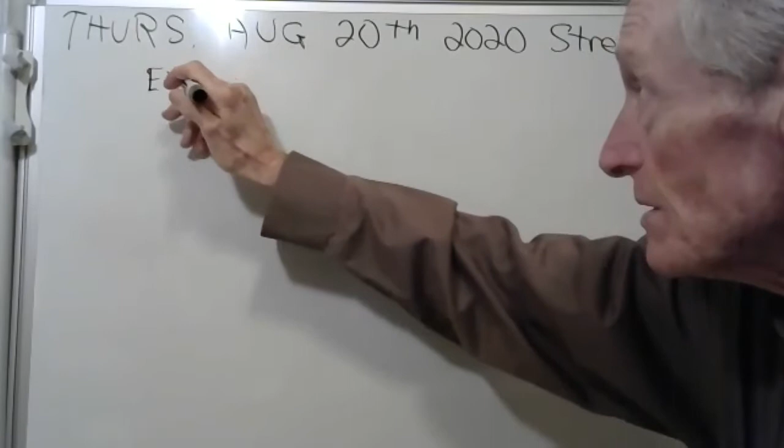Okay, well, we're going to get started. Let me make a note to my IT person. All right. We are in Strength of Materials. I'm going to look at my syllabus, or my schedule, and see what we're supposed to do today. This says stress and internal loads. Okay. Well, you can't do internal loads unless you have the external loads. So there's external loads, and there's internal loads. In order to find the internal loads, you first have to find the external loads, and then you can get the internal loads.

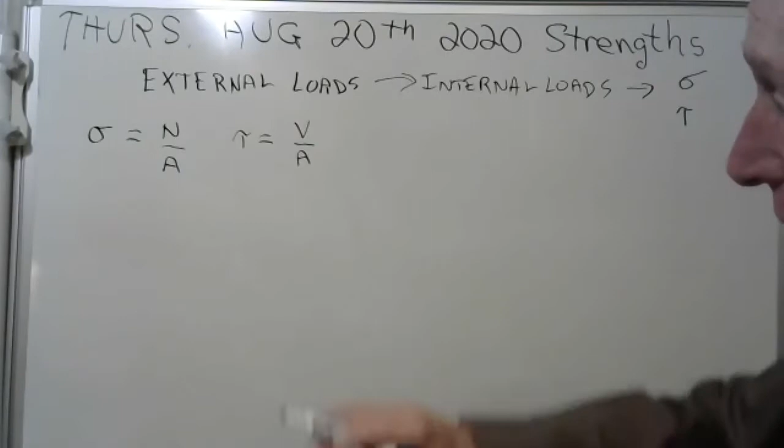And once you get the internal loads, you can get the stresses, because there's two kinds, as I was telling you last time. This is normal stress and that's shear stress. They come from the internal loads. There's an equation for normal stress that goes like this. You see that N right there? That's an internal normal force. And shear stress goes like this. You're dividing by the area. You see that V right there? That's the internal shear force. To find the stresses, which are all important, you've got to get the internal loads.

Now let me show you the difference between forces and stresses here. Let me see who I've got right now. We got a good crowd here. We've got Nicholas, Ashley, Ben, Brendan, Brian, Mohammed, Julian, Darren, and Chase. We got a great group here.

Okay, well, let me demonstrate. The most important concept in this class is stress, and it comes in different types. This here is called normal stress.

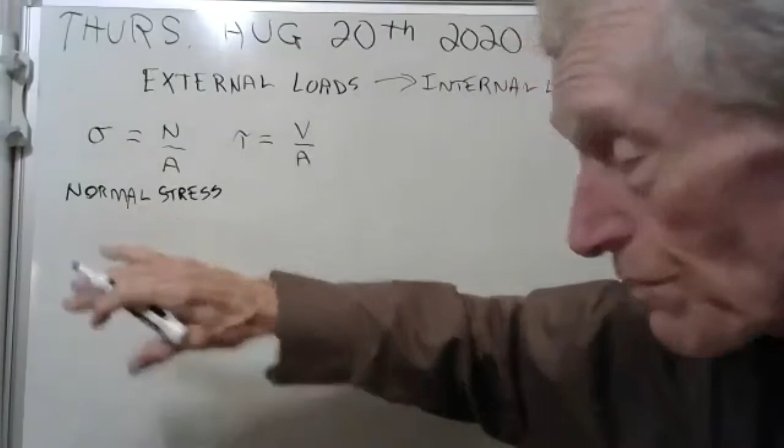The word normal refers to being perpendicular to a surface. And then this is shear stress. Shear stress is not perpendicular to a surface, it's parallel to a surface. Normal is perpendicular, shear is parallel. Here's your symbols. That's a little secret symbol for perpendicular, and there's the little secret symbol for parallel. Any questions so far?

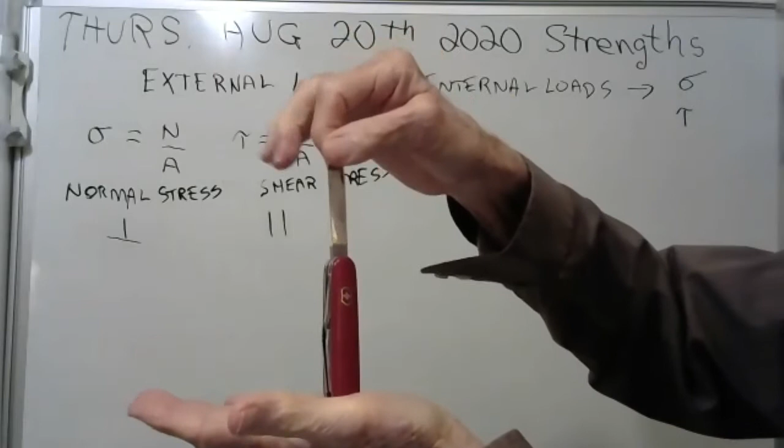Okay, well, let's do some problems and try to show you that. I was going to show you though about why stress is so important. I've got my Swiss Army knife here. I'm sure you guys have all seen a Swiss Army knife. Now, if I take this Swiss Army knife and I just hold it on my hand like that, that doesn't hurt the palm of my hand at all. Of course, if I let go, it'll fall. I have to kind of hang on to it there. But it's not hurting my hand or my finger.

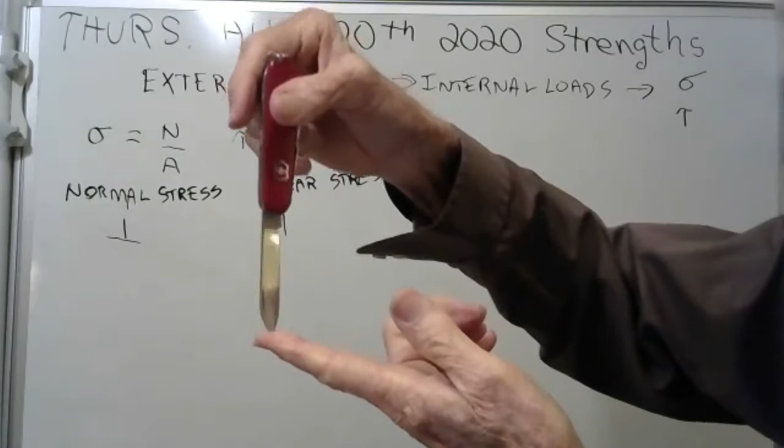I could put it on my finger. Here we go. Can you guys all see that? It's on my finger. It doesn't hurt my finger at all, because there's a lot of area right down there. Now, if I turn it around like this, maybe this isn't too smart. But see, here, it's the same force, but it's starting to hurt because the area of the tip of that blade is very small, and that makes the stress very big. Well, that's enough of that. There's sort of a hole right there. It didn't punch a hole in my finger, but it's a little bit uncomfortable.

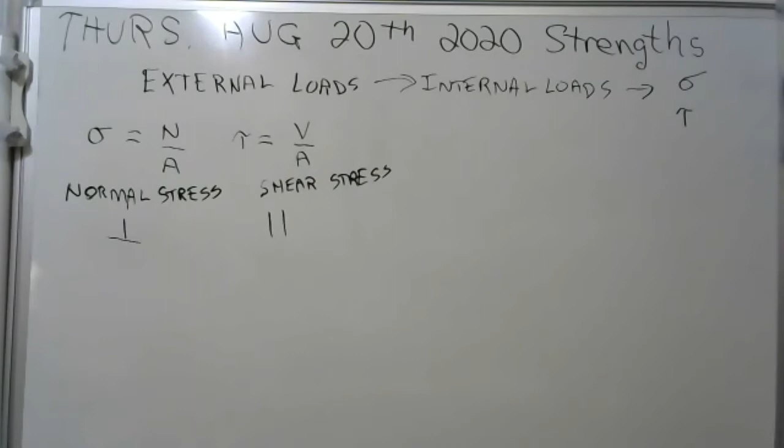You guys probably already understand all that, but see, stress depends on the area. And if the area is small, you know how fractions work. If the denominator is small, it makes the fraction big. And so the stress gets very big if you make the area very small. Same with the shear stress. Okay, well, great. Any comments or questions? We'll work a problem. All right.

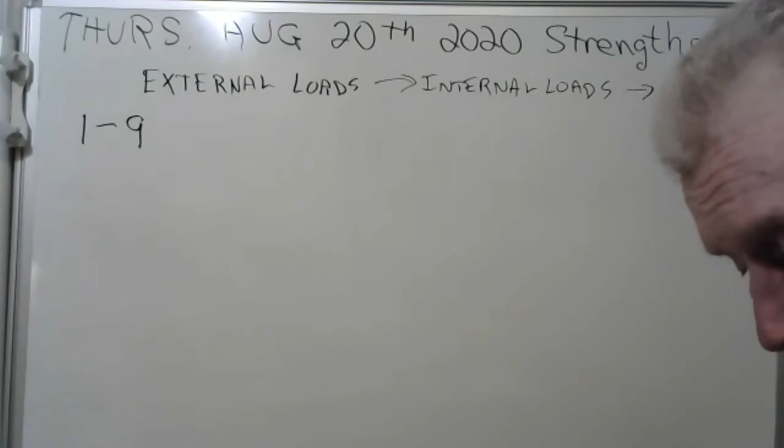Let me find it here. What page is it on? It's on page 18. Okay. Now, if I was doing this for homework, I would get some engineering paper, or else some cheap graph paper, and I would draw this to scale. I need you to draw a diagram. Now here it goes. Let's see if I can do this. This thing is 6 meters long. Why don't I use inches? Let's go with inches. Here we go. 6 inches.

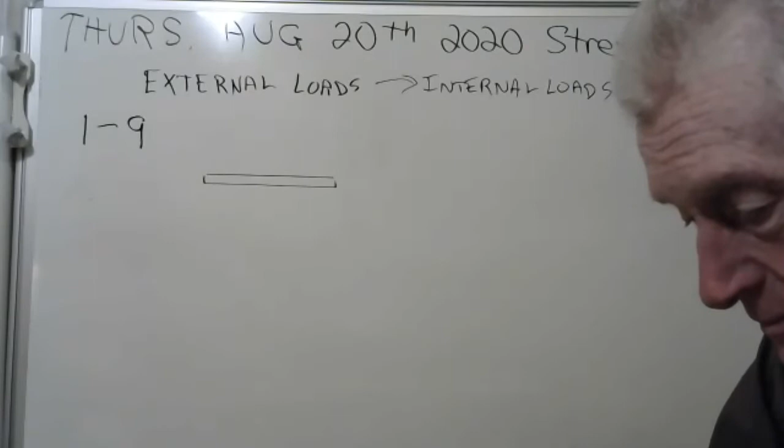Okay, now there's our beam, and there's going to be a force up here. Why don't I put my forces in red? That would be good. Let me find some red here. Now see, these are going to be external forces. There's going to be an external force there. I don't know if they're going to be equal. In fact, I think it looks like this one's going to be bigger.

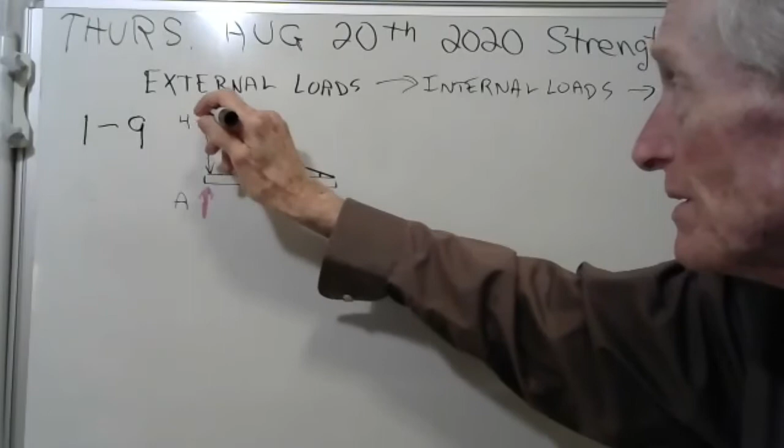And they gave them names. They're going to call that A and B. And then they have a triangular force distribution. So let's put that on there. See, they've got a force distribution. And over there on the end, it's 4 kilonewtons per meter. Okay.

Now what we're going to do is we're going to write the resultant of that distributed load. And hopefully you guys already know this, but the resultant of a distributed load is equal to the area, and that's a triangle. And this distance here is 6 meters, and that distance there is 4. And they taught me in school many years ago that the area of a triangle is 1/2 the base times the height.

I've got 1/2 the base. The base is 6 meters. The height is 4 kilonewtons per meter. And this will give me the resultant. I can do that in my head. I get 12. The meters cancel, and so you get 12 kilonewtons. Now, the resultant of a distributed load, you already knew this, but I'm reminding you, it goes through or passes through the centroid.

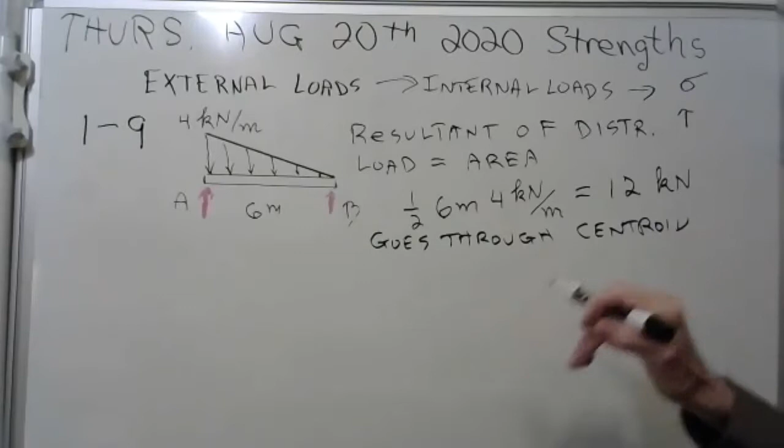Do you remember that the centroid of a triangle, it's something about 1/3. Let's ask one of our students and see if they remember that. We'll just ask somebody. Hey, Ben, unmute and tell us, where do you put the centroid on a triangle like that? On a triangle, it's 1/3 from the largest side. You got it. Ben's got it. It's 1/3. So let's see, if this is 6, divided into 3 pieces here, that'd be 2 meters, 2 meters, 2 meters. That makes 6 meters.

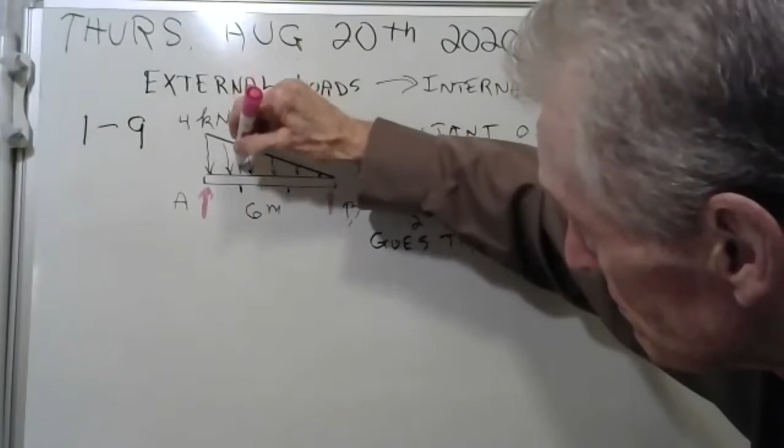So here you have it, guys. The resultant, I'll call it R. It's 12 kilonewtons. Okay, great. It's 1/3 from the bigger side and 2/3 of the way from the smaller side. And hopefully you guys remember doing that. And now the next step is to find the A and B. Now to find those, you have to use these equations, the equilibrium equations. And of those, this is the most important. Taking moments is very powerful.

So I'm going to take the moments about point A. We'll call this point A right here. And if you take the moments about A, you get negative 12 kilonewtons times 2 meters, we decided, plus B times 6 meters equal to 0. And if you solve that, you'll get B is 4 kilonewtons. We just figured out B. B is 4 kilonewtons.

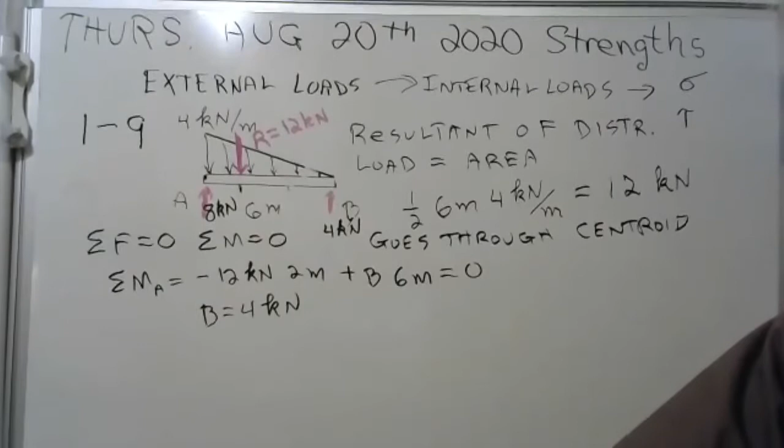But I want to ask one of my students, I picked on Ben there. Let me go to my friend Nicholas. Nicholas, how come this moment here, this 12 kilonewtons times 2 meters, how come it's negative? How come it's clockwise relative to A? That's the answer. The answer is it's clockwise. See, that 12 kilonewtons would try to spin you clockwise about A. You can see that. But B here tries to spin the whole thing counterclockwise about A, so that's plus.

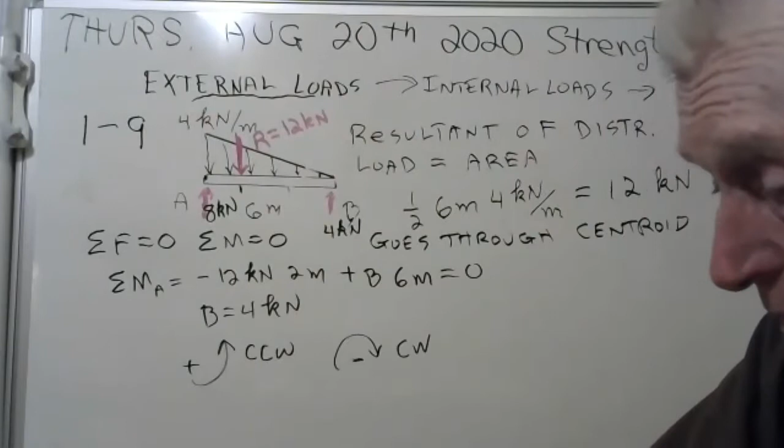Counterclockwise, let me refresh your memory. Counterclockwise is plus, clockwise is minus. So you know what we've done? We have found the external loads. When you work your problems in this class, you got to find the external loads. But that's not how you get at the stresses. Remember, to find the stresses, we need the internal loads.

Okay, well, let's see what they want us to find here. Let me read this. We're doing problem 1.9. If you just tuned in, it's on page 18 in your book. And what am I looking? Oh, they want us to find the resultant internal loadings. Oh, we're not going to find the stresses. They don't care about the stresses. We'll get to that later. They want to see if you can find the internal loads.

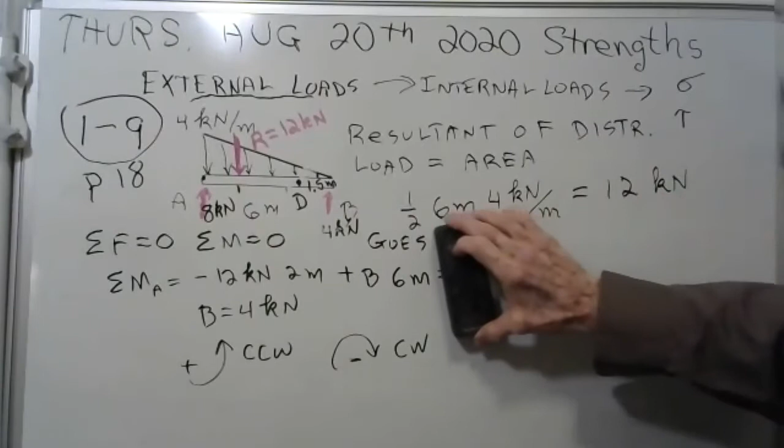Now there's 4 kinds of internal loads, and they want us to do it at point D. Okay, well, where is D? Well, D is right here. That's point D. And they say it's 1.5 meters from the end. Okay. 1.5 meters from the end. They want the internal loads. Now let me list the internal loads for you. We don't need any of this stuff here. This is all wonderful, but I think we understand it okay. There are 4 kinds of internal loads.

Now the book sometimes calls these something else. It calls them resultant or reactions. Internal, there's different names for these. Internal reactions. So see, what they are is reactions to the external loads. Some books call these the resultants. Internal, yeah, some of them do. Resultant loads, there we go. Different names for it, but there's 4 of them.

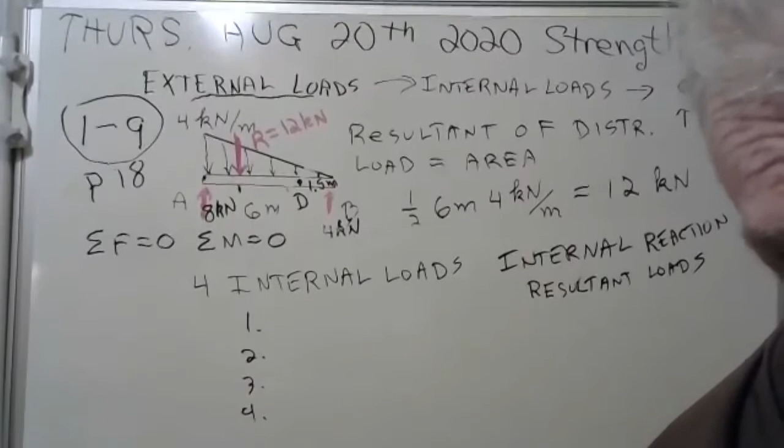Is there room for me? Yeah, there's room. Okay, now I'm going to ask one of my wonderful students here if they know the names of those 4 different kinds of internal loads. Let's go to my friend Ashley. Ashley, do you know the 4 different kinds of internal loads? Normal. Yep. Shear. That's right. Bending moment. That's right. And torque. You got it. These are the 4 things, and this is what they wanted. And we're going to find it for them.

Now, these first 2 things are forces. And so in this problem here, they're going to be in kilonewtons. But these things here are moments. And they're going to be in kilonewton meters. Moments are in Newton meters or kilonewton meters. But there is no torque. See, torque would be if this thing was being twisted along its axis. Torque is a twist along the axis. The axis of this beam goes like this, and torque would have to twist that axis. There is no torque, so we don't need to worry about it. But we do have these others.

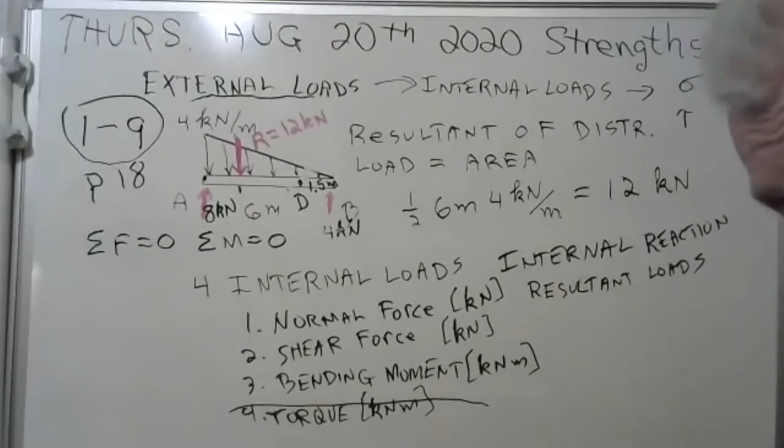And I take that back. You know what? There aren't any normal forces either. All there is is shear forces and bending moment. I don't see any stretching or compressing going on. No, I don't. Now, to be perfectly honest with you, there are some normal forces in that beam, but we're going to study those later, because the beam bends.

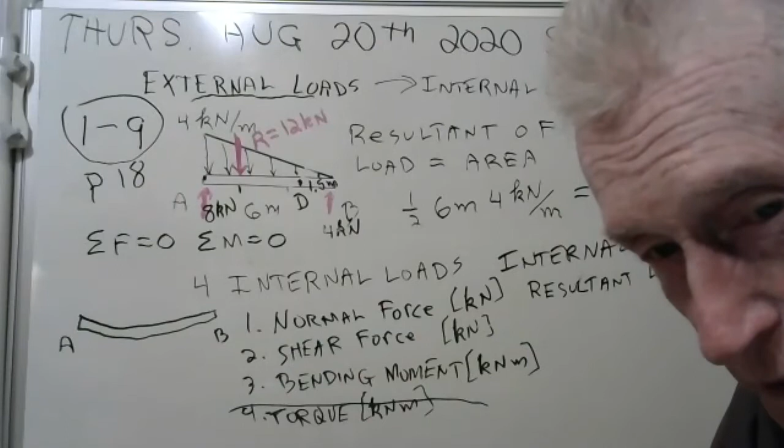That beam is going to deform a little bit. Here, I'll draw you a picture of it. It's going to kind of go like that. Now, I'm exaggerating this like mad. You probably couldn't see any of this deformation with your unaided eye. But can you see that if you have this force going down and these forces going up, it's going to make a little dip in that beam? Yeah, and it will deform a little bit. And you will discover that you will have tension on the bottom and compression on the top.

So you will have normal forces, but we're going to pretend that we don't know anything about that. So I don't think we need to worry about that. I bet the answers in the back will have a shear force and a bending moment, and that's all we need to worry about. We're going to find those now in a minute, unless you have a comment or question. Okay, well, we're going to find the internal loads. Here goes. Let me make a little room here.

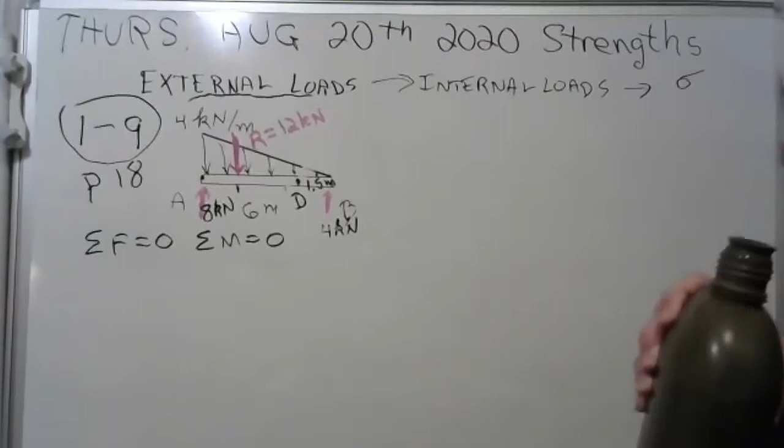That was all interesting about the resultant of a distributed load being equal to the area, and it goes through the centroid. But now we're going to find the... lost my train of thought. Let me get a drink of water and I'll remember. Oh yeah, we're going to find the internal loads, the two of them we're interested in, at point D.

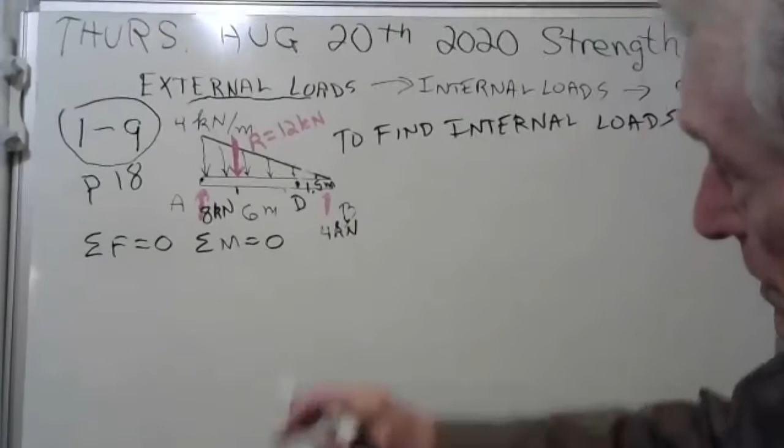Now to find internal loads, you have to break the structure into parts. Let me write that. To find internal loads, you have to break the structure into parts, or you could say you have to break it into sections and analyze the sections or the parts. So I'll just say break it into parts. And then what do you do? Well, you have to start all over. You have to draw your diagram of the part you're talking about. Then you have to find all the external forces on your part. Then what? Well, then you're done. Okay, let's do it.

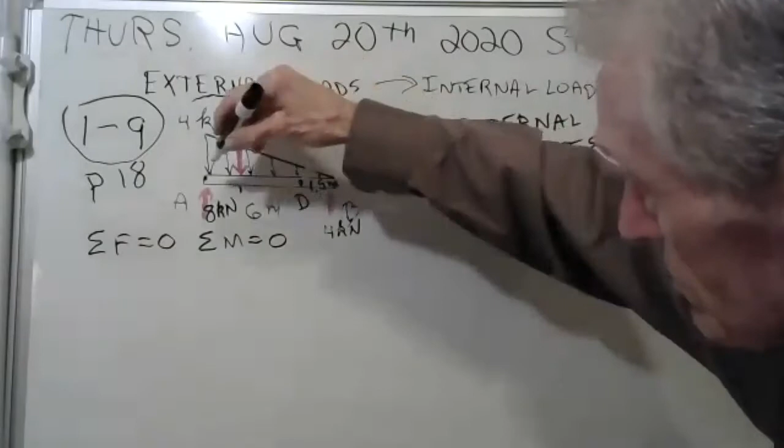Now they want us to do it at D. So you section this structure at D, and we're going to cut it with a pretend virtual chainsaw. There we go. Now we're going to redraw that body. Here's D, and here's B. And it just has a little part of that distributed load there. See it? There it is.

I need to know what this value is right here. Well, see, that's 4 there. All the way at the end, it's 0 kilonewtons per meter. If you were smack dab in the middle, it would be 2 kilonewtons per meter. If you want to find out what the distributed load is there, and by the way, they use a little symbol W in this book for distributed load.

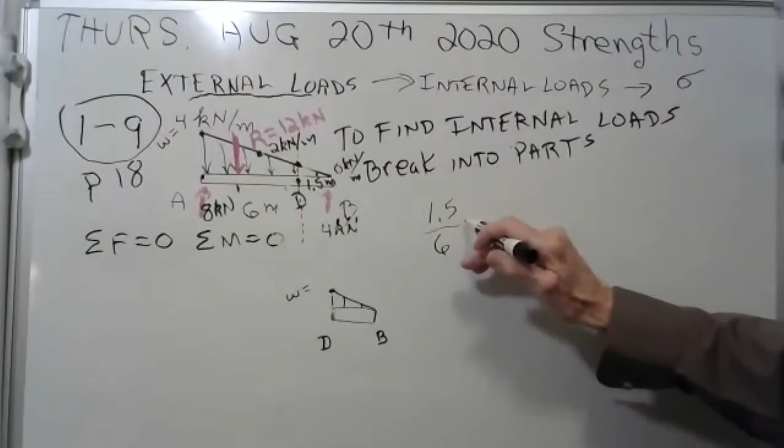I need to know what that W is. Well, 1.5 is 1/4 of the way to 6, isn't it? 1.5 is 1/4, isn't it? So what's 1/4 of 4? Oh, hey, I can do that. I can handle that. That value right there is 1 kilonewton per meter.

Now see, what we're doing is we're starting all over again. We're drawing our diagram and we're finding all of the forces. Well, we already have a force here on the end of 4 kilonewtons. That's 4 kilonewtons.

Professor Griffin, is it 1 kilonewton per meter? Is it just 1 kilonewton? Like, is that the resultant? No, it's 1 kilonewton per meter. See, this is 4 kilonewtons per meter. If you were right in the middle of this distribution, it would be 2 kilonewtons per meter. At the very end, it's 0.

Oh, okay. Tell me your name. Julian DeCarlo. Thank you, Julian.

Yes, sir. Now, we're going to have to figure the resultant of this little distributed load here. And I forget what excellent student informed us earlier, but you go 1/3 of the bigger side. Well, what's 1/3 of 1.5? That'd be 1/2 meter, wouldn't it? And so it's right. This resultant here, now this is a different resultant. This is just the resultant of that little distributed load there. And we're going to figure out what it is.

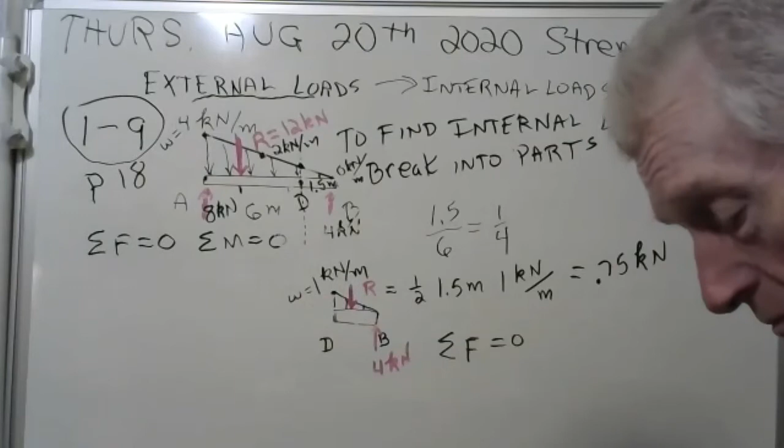Okay, guys, the sum of the forces has to be 0 on this part or section. If you got 4 going up and 0.75 going down, then it seems to me you're going to have a shear force going down. How big should it have to be in order for the sum of the forces to be 0? Go ahead and just tell me, somebody. See, we got 0.75 going down. I should draw that kind of small. And we have 4 going up. What's this going down? I mean, they have to add up to 0, right?

3.25. I love it. It's 3.25 kilonewtons. You know what? That's the shear. Well, great. We figured out what the shear is. Now, what's confusing about shear is they define shear on a left-hand member. If the shear is going down, they say that the shear is positive. And if you have a left-hand member and the shear is going up, they say that's negative. But this is not a left-hand member. We have sectioned it here, and we're looking at a right-hand member.

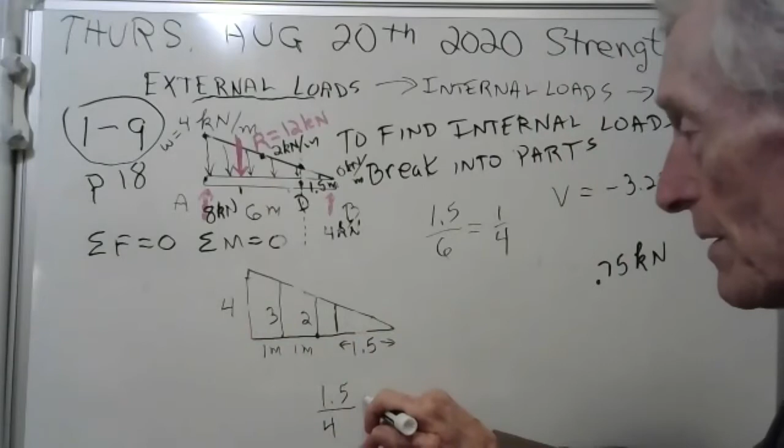And so if you took 1.5 over 4, you get 1/4. No, that's not right. Now you got me mixed up, Mohammed. I was doing fine. The length of that was 6 meters, not 4 meters. Oh, why, okay. That's my problem. Thank you so very much. Something went haywire.

We've got, this is 6. Oh, no. I'll get it right eventually. This is 6 and this is 4. And if you were right here at 3, then this would be 2, if it's 3 and 3. If you divide it in half, I don't know if I divided that in half or not. It'd be more like right there, wouldn't it? Because 3 out of 6 is a half, and half of 4 gives you 2. It makes sense. Now they wanted us to go right here, though.

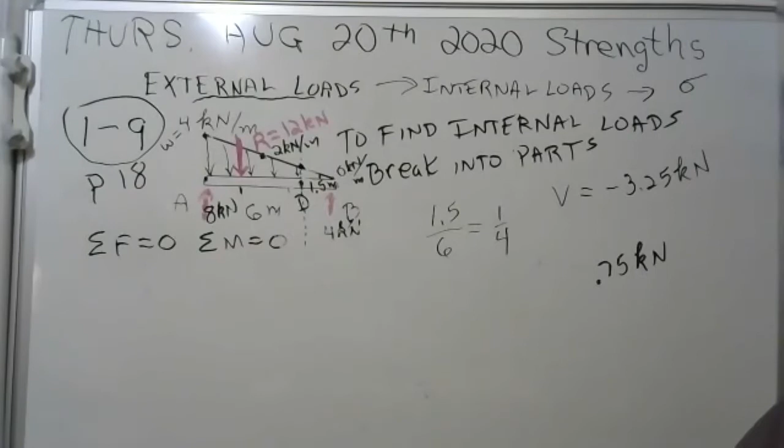This is 1.5, 1.5. So what that would be is 1.5 over 6. That's a fourth. Well, a fourth of 4 is 1. I didn't explain that very good. Mohammed, did you understand that now, though? Yeah, I got it. Good. In spite of me, he's got it. But thank you for asking. All right, good, go on. So now we know that what we want is 1 kilonewton per meter.

Let me redraw this thing now, and we'll finish our problem. We have 1.5 meters. We have, what is it, 4 kilonewtons going this way. We have, what did we decide on? I forgot. Going down. 1. Yeah, 1. No. This here is your shear. It's 3.25. These are all kilonewtons.

And this was 0.75. Yeah, now I'm remembering how we did that. You got 0.75 going down, 3.25 going down. That's your shear. They add up to 4 going down. You got 4 coming up. Now we're after the bending moment. Can you see that there's going to be a bending moment? This thing would spin. Can you see that it would spin? We don't spin in here. So we're going to write, what is this, point D? We're going to write the sum of the moments about D. Here we go.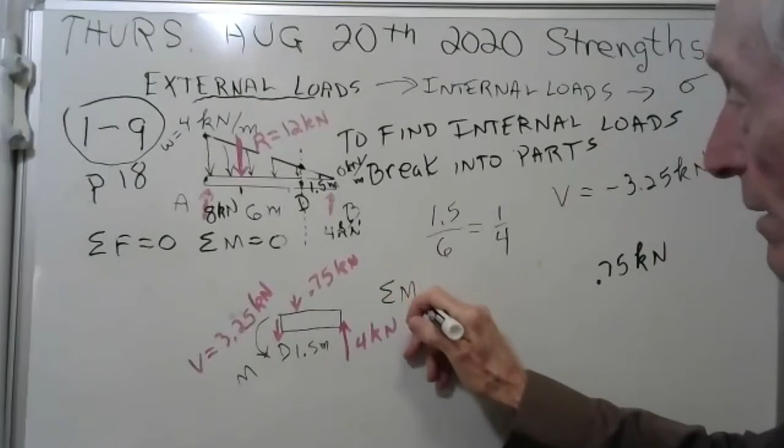Well, we have a negative 0.75 times this distance here, which is, I think, a third times 1.5 meters. And then we have plus 4 kilonewtons times 1.5 meters. Uh-oh, I'm running out of room now. And then we have our bending moment, plus M. Oh, gee, I ran out of room. Equals 0. The sum of the moments about point D here has to be 0. And we're going to solve that. So let me get my calculator and see what happens.

0.75 negative times 0.5 plus 4 times 1.5 equals that. And so when I solve this, I'm getting an M of minus 5.625. So the M isn't going that way, it's going the other way. It's going like this. It's 5.625 kilonewton meters clockwise on the right-hand section.

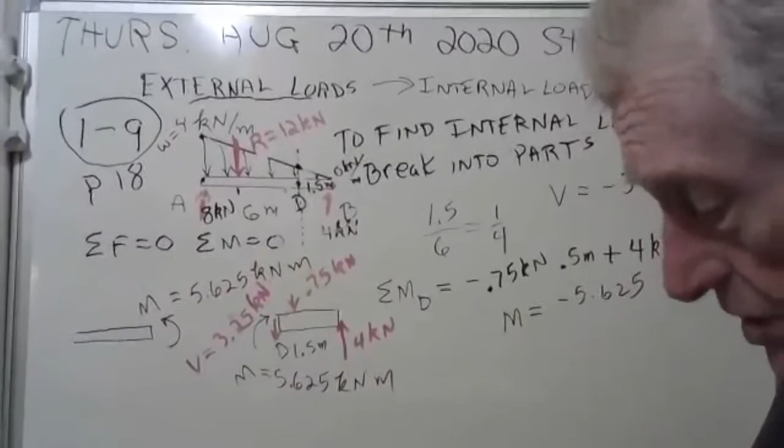And so the bending moment should be, in the answer book, 5.625 kilonewton meters. Now let's look and see how we did. Look up the answer to problem 1.9 in the back, and we'll see if they got that right. We're looking up problem 1.9. No.

Can't find it. They have P problems, which are preliminary problems. They have F problems, which are fundamental problems. And then they have the hard problems. They don't have P's or F's. They just have a number. I still can't find it. Okay, well, here we go.

1.9. They said the bending moment is a positive 5.625 kilonewton meters. That's what we got. Yay, we got what they got. All right, here's your chance to ask me anything you want about that problem. We just got it. We did it. Do you have any questions about it?

I got a question. When you're dividing it, can you choose either side? Like, obviously we choose the right side because it's a nice triangle and not the trapezoid on the left, but could you choose either side? Absolutely. You can choose either side. Now tell me your name. Braxton. Braxton. Yes, you could.

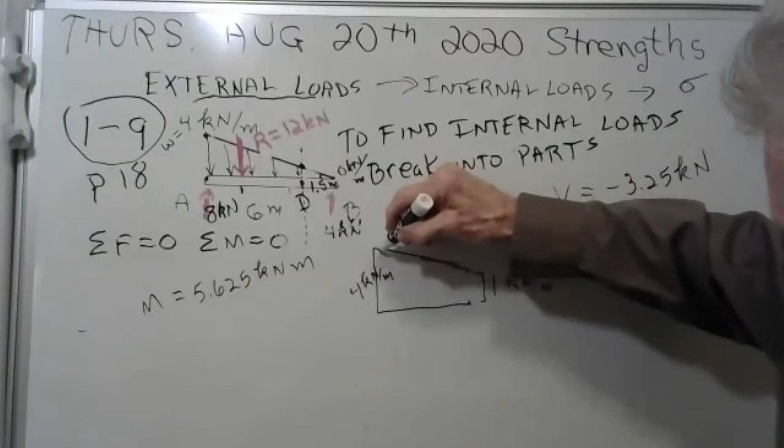And this here is 4 kilonewton per meter. And this here we decided was, it was 1, wasn't it? 1 kilonewton per meter. Yeah, I probably need to draw that a little bit more like that. And the area of a trapezoid, I don't know if you remember this, guys, but the way it goes is, and by the way, I think that would be 3.5 meters, wouldn't it? Because they're 3.5, 1.5. No, it's 4.5, isn't it? It's 4.5 and 1.5. Does that make 6?

Yeah, I think so. The area of a trapezoid is 1/2 the base times the sum of the heights. It's kind of like a triangle. See, a triangle is 1/2 the base times the height. But a trapezoid is 1/2 the base times the sum of the heights. Okay, well, let's see. I wonder if that's right. I'm trying to remember stuff from whenever that was, junior high or high school. I could be wrong, but I think that's right.

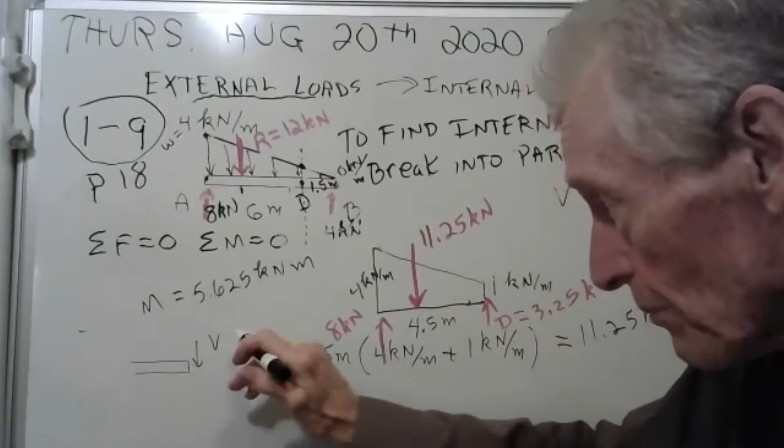Now here, the beauty is, this is going up on the left-hand member. And remember, shear going up on the left-hand member is negative. And so the answer is negative. They define shear going down on the left-hand member to be positive. But this shear is going up on that left-hand member. Here's your member. And so it's negative. And we could take the time and do the bending moment too, but we have other fish to fry. We're going to move on. Unless there's a comment or question, I'm listening.

Okay, well, I'll ask you a question, see if you guys have been listening. And let me erase this because this is what I'm going to ask you. What I'm going to ask you is, how do you find internal loads? Let's put a question mark on that. How do you find internal loads? And let me pick on one of my very best students here. Gosh, we have 2 Bens. There's Ben Harris and Ben Seaman. Ben Seaman, I haven't picked on you at all. Ben Seaman, how do you find internal loads? Go for it. How do you do it?

First, you gotta find external loads. That's right. Find equilibrium for those, and then you can break it off. That's right. Section it. He's got it. He's got it. You have to break it into parts. You have to section it. You have to take your virtual chainsaw and cut it someplace, and you have to break it into parts. That's the answer. Good going, Ben.

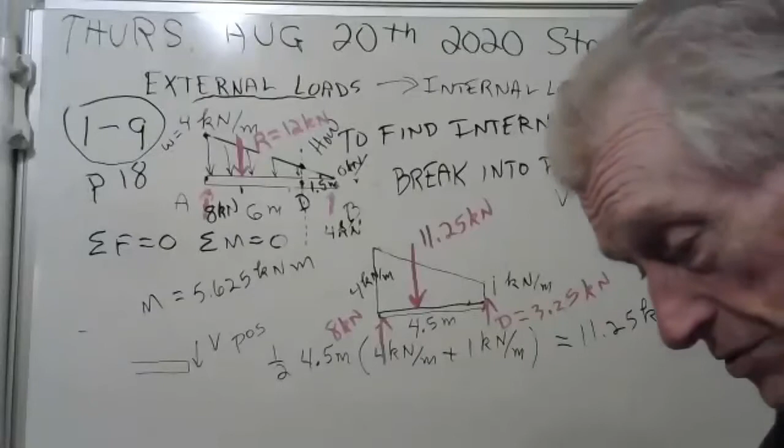You break it into parts. And then once you do that, then you start all over again. You draw the free body diagram with all the external forces, and then you solve for any external forces on the part that you're working on. Good going. So with that, Ben listened to what I was telling him. Okay, well, let's do some more here. Let me make a little room here, and we'll have some more fun.

Anybody else have a comment or question on anything there? I'm listening.

Okay, well, we're just going to do the same thing over again, only this one's, I think, easier. This is problem P1-3. P is preliminary, I think is what they call it, preliminary. In other words, it's going to be easy. It's an easy problem. Let me see if I can find it. P1-3.

Well, there's the F problems. Okay, let me keep looking here. I'll find it. Anybody know what page these P problems are on? I need help. 38. 28? 38. 38, thank you so much. That helps me. I got lost.

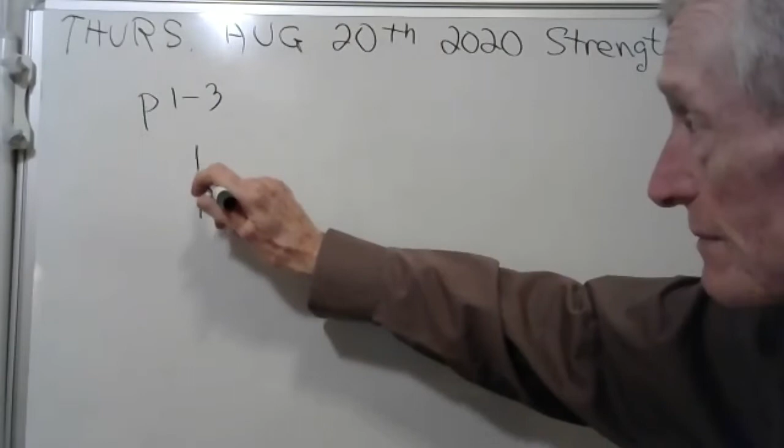Okay, this is a P1-3. Now let me draw it. It's a cantilever beam is what it is. This is a fixed connection. They call this a fixed connection. That's just the name of it. And it's called a cantilever beam. That's the name of it. This thing is a cantilever beam.

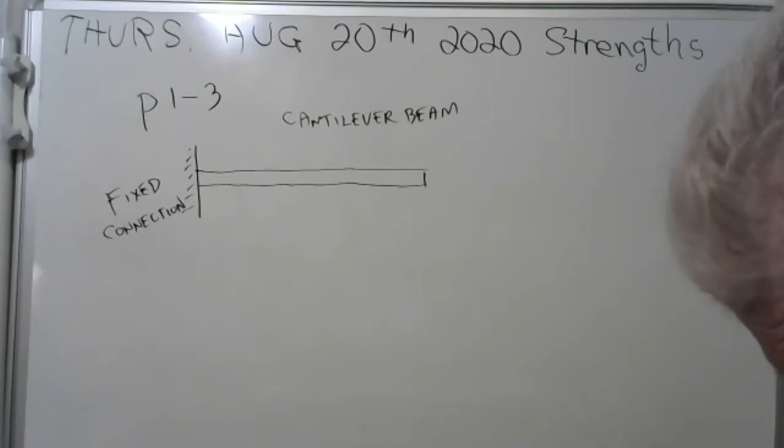And these are external forces. There's 10 kilonewtons here, 6 kilonewtons here, and 2 kilonewtons here, and 5 kilonewtons here. And there's going to be a force there at the fixed connection. The sum of the forces has to be 0. So I need my wonderful student to tell me what I put right there. Let me pick on one of you guys. How about my friend?

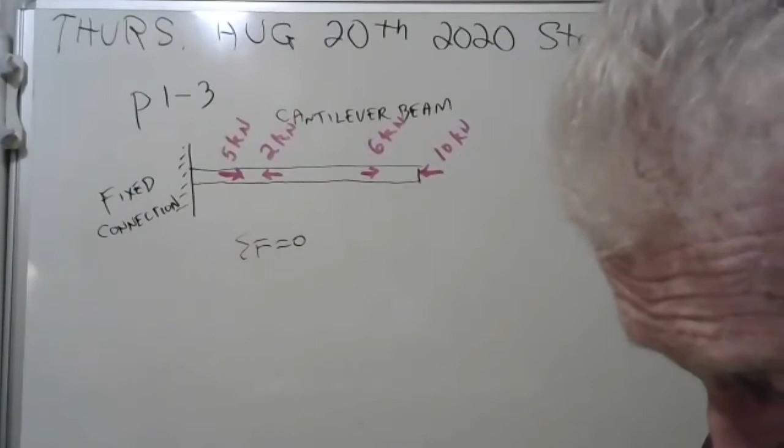Hey, Noah, have I had you before in class, Noah? Not before. Oh, this is our first time together. Well, I've had you on Tuesday. Oh, okay. Not like a semester before. You must be in my thermo class then? Yes, sir. Man, I'm getting mixed up now. Oh, yeah. You're in my thermo class. I am. Yeah. Good going, Noah.

Okay, Noah, the sum of the forces have to be 0. I don't think these add up to 0. Just a minute. Let me add them up. Let's see. And no, they don't add up to 0. So Noah, what do you have to have right here at this fixed connection? You got to add up to 0, Noah. That's right. Let's see. Hold on. I'm adding up right now. Yeah, take your time. Looks like you're missing 1 kilonewton.

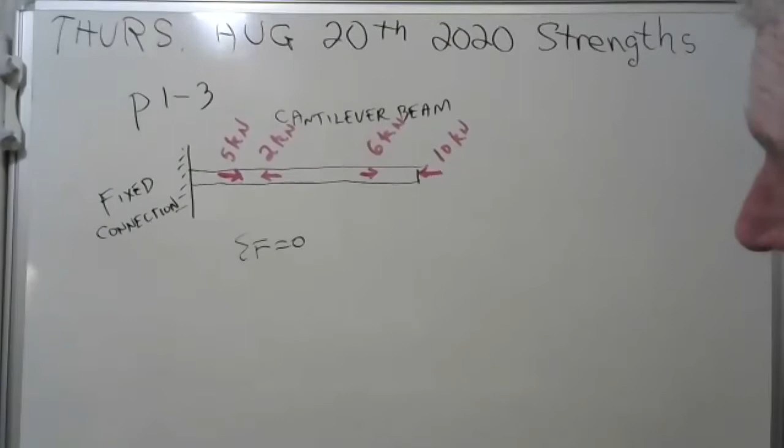Yeah. So we're going to have 1 kilonewton, Noah? Right. Which way? Going to the right or to the left over here? You got to be going to the right. You know what? He's right, isn't he? You have 1 kilonewton going. Good going, Noah. Proud of you. Okay, now those, though, are external. What is there? 1, 2, 3. There's 5 external forces. Those are external.

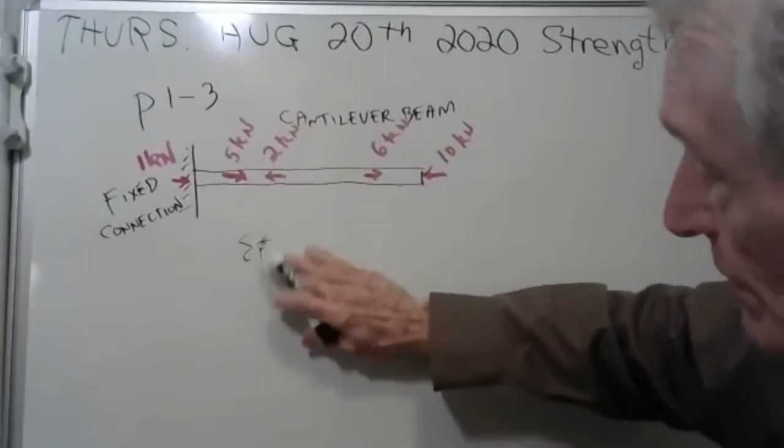And I've told you that stress is found from the internal. We're going to have to find the internal forces. Here, let me show you these equations for stress. Now, we're talking normal stress right now. There's one that goes like this. There's another one that goes like this. But we don't know how to do it. It's several chapters down the road there. But this is a normal stress that you get when you have bending. We don't have any bending going on, so we don't need that.

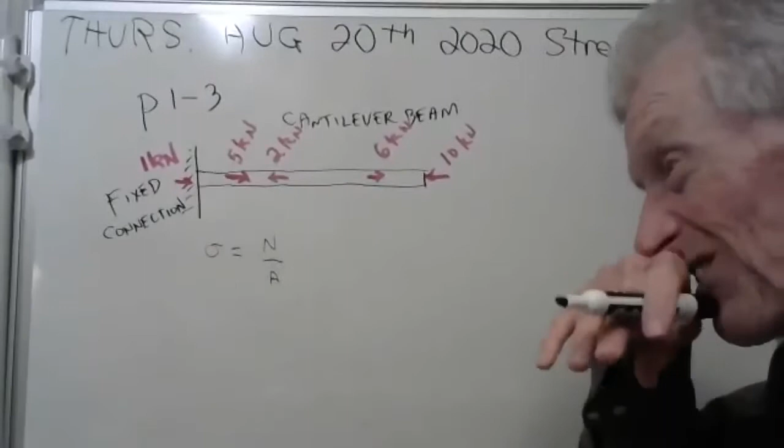But if you want to find the normal stress, you got to find the normal internal force. You understand? Now, the way you do that is the way we just did it. You have to break it into parts. So we're going to break it into parts. See, if you section this right here, broke that into parts, and you just looked at this little section right here, if you have 1 kilonewton there, can you see that you got to have 1 kilonewton going to the left in here? You know what that is? That's your internal force. See, this is external, but that in there is internal.

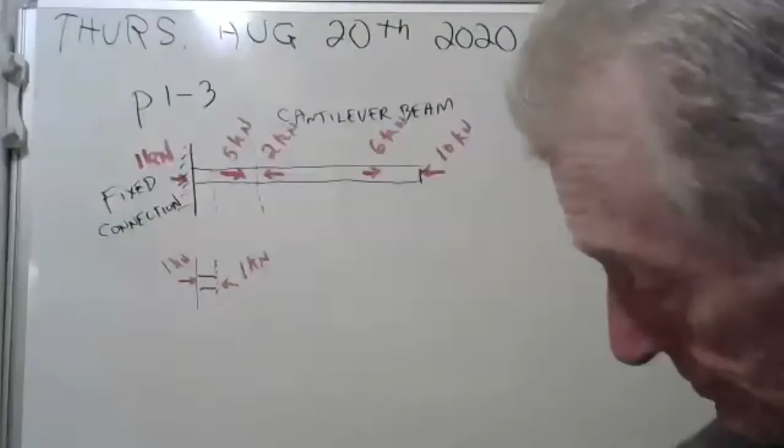Now, if you sectioned it in here, let's look at this section in here. I'll try to draw it for you here. Well, you have this 1 kilonewton here. I'm putting the external forces on it now, and you have the 5 kilonewton here. But in here, I think you got to have 6 kilonewtons compressive normal force in there. The way you find the internal loadings is you have to break it into parts. Here, let me write that. To find internal forces,

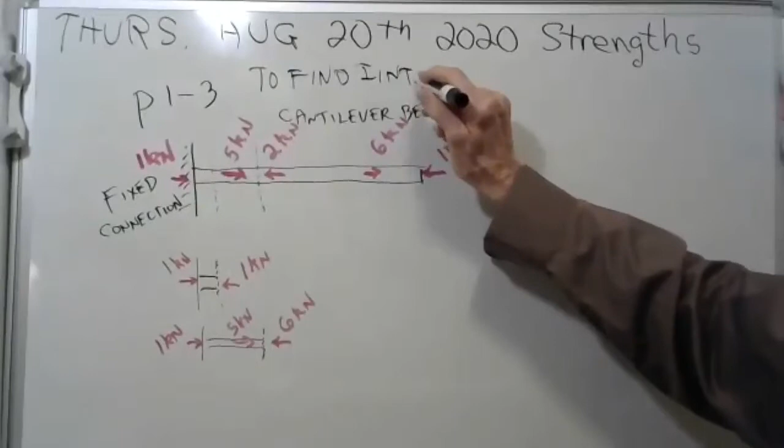now I know I've already said this about 3 times, but if you're a normal person, you don't get things the first time, or maybe even the second or third time. After maybe about a dozen times, it'll start to sink in, and you start to think, you know what? Mr. Griffin says the way you find internal forces is you have to break it into parts. Whoops, I ran out of room there. You have to break it into parts. Okay, well, here, let's section it in here now. Here we go. Now, if you sectioned it in there, I'm running out of room here.

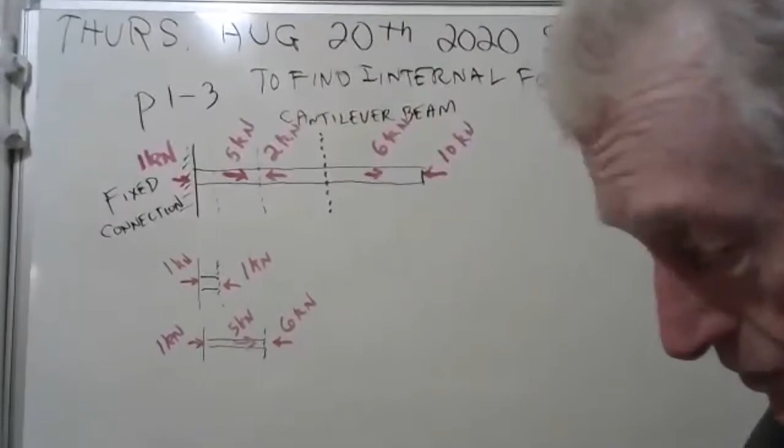Well, if you did, here's what you'd have. I'm probably boring you guys. This is so easy and simple, but I'd kind of like for you to get this. Now, these are the external forces. But what we're trying to find is the internal force.

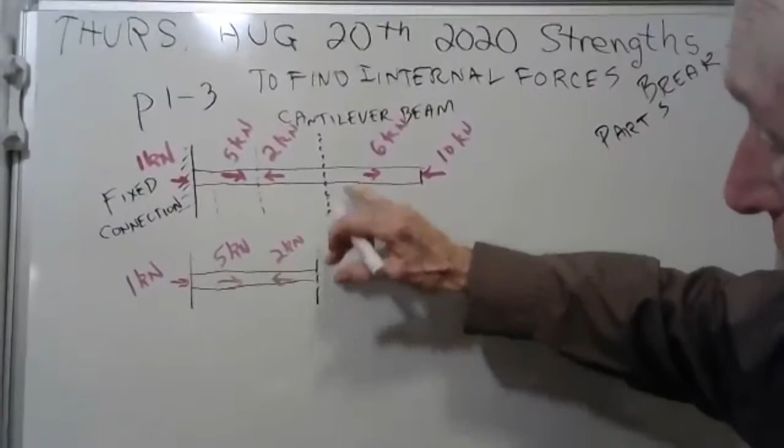Let me go to one of my wonderful students here. How about my friend Samuel? Samuel, you've helped me before. Samuel, what do you have to have in here so that the forces add up to 0? 4 kilonewton force to the left. You got it, Samuel. Good going.

Excellent. See, that's an internal force, Samuel. It's internal. It's not an external. These are the external forces. This is internal. Now, what we're going to do is we're going to make an internal force loading diagram. That's what we're going to do now.

Now, I gave you some homework. Let me see here. And I asked you to do problem F1-14. I think, just a minute, let me double check what I want you guys to do. No, that's not, no, never mind. Never mind. No, F1-11. Yeah, that's the one I want to talk about.

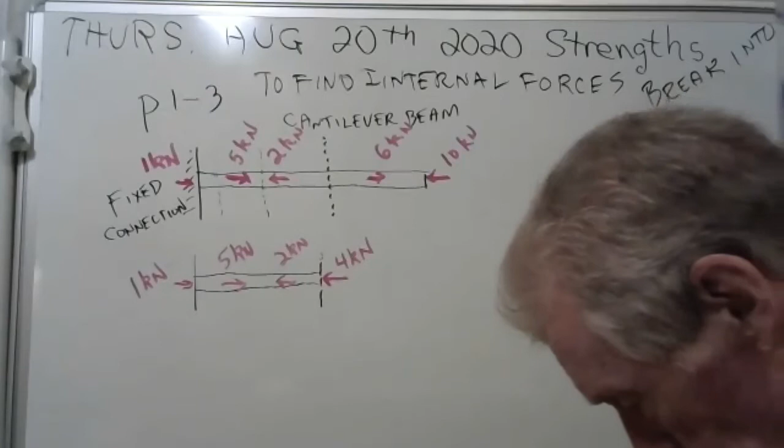On your homework, guys, you're going to do some homework for me. One of the homework problems is F1-11. I want you to draw the normal force loading diagram. We're going to do it for this problem P1-3 here in a minute, so you'll know how to do it. But that's part of your homework. I want you to draw the normal force loading diagram.

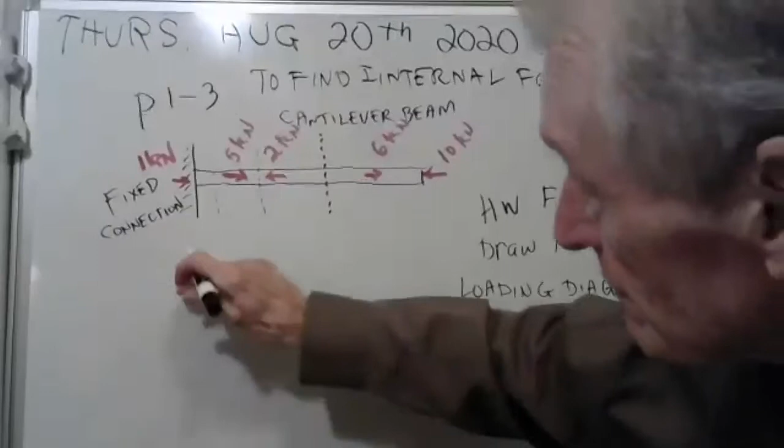Okay, well now we're going to do it. Here goes. Let me make some room here. This is going to be your normal force. This is going to be your x-axis. I'll get a drink of water here. I'm drying up.

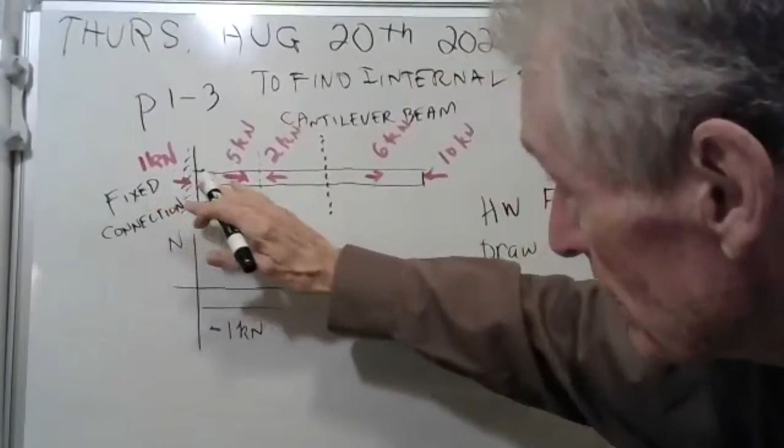Now we decided, I erased it, but we decided that there was a 1 Newton, no, 1 kilonewton. It's compressive. It's going to the left. It's compressive, so it's negative 1 kilonewton. Not that far. It goes to where that 5 is. About to there, maybe. It's a negative 1 kilonewton.

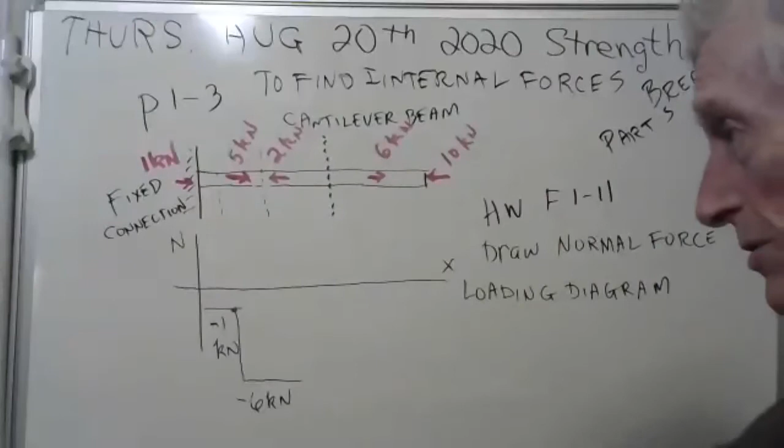And then in here, I forget which of my students helped me on that, but in here you've got 6 compressive. So this drops down to 6. It comes over to here like this, negative 6 kilonewtons. Now what I'm drawing is called the normal force loading diagram. That's what this is. This is the normal force. These are internal. See, a normal force is internal. It's a normal force loading, uh-oh, I'm running out of room here, diagram.

Okay. Now in here, let's see, you got 6 going to the right, 2 going to the left. That makes, you need 4 going to the left, right? This thing pops up to about here. And it stays minus 4 kilonewtons till you get to here.

Now we haven't done it in here yet, but if you think about it, you got 1, 5, and 6 going to the right. That makes 12 going to the right, 2 going to the left. You need 10 going to the left. So this jumps back down to minus 10.

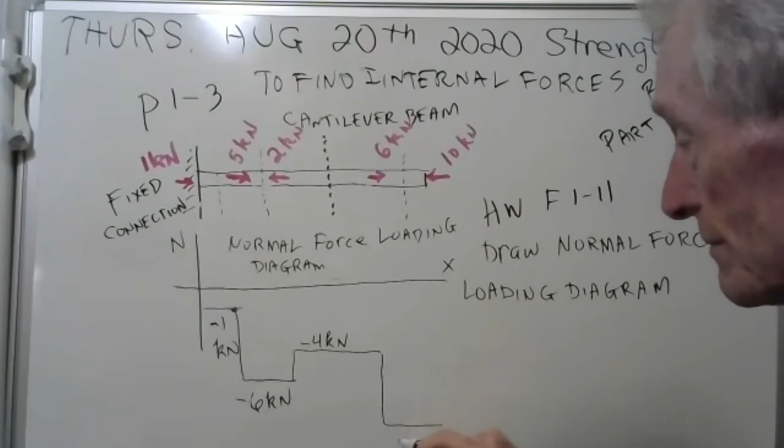It does not go back up to 0. There is normal force inside this whole piece right here. It doesn't go back to 0 at all. You got 10 kilonewtons pushing on you here. It's not 0 right inside there.

It's that. Now, if you color this, I wonder if I got any pretty colors here. Just a minute. Let me see. I don't have any. Wait a minute. I got a blue color here. Let's make this pretty. See, I'm going to color this. You know, won't this be pretty? Look. I've got myself kind of messy there. Oh, well.

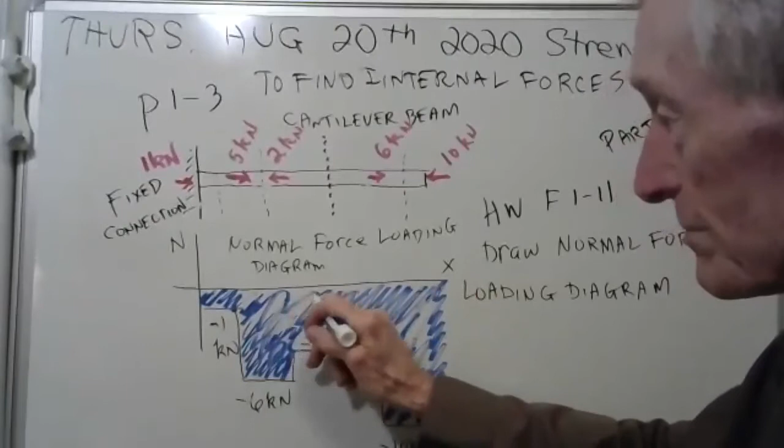There it is. Ta-da! We made ourselves a pretty diagram there. We made a diagram of the internal forces. It looks like that. Okay, great. That's how you do it, and that's what I want you to do on this homework problem.

I want you to draw me the normal force loading diagram on that homework problem and submit it to me on Blackboard with your, what do they call it? We were talking about that earlier, the scan camera. I don't know, you guys know more about computers than I do. Okay, well, let's move on.

Is there any comment or question so far? Yeah, actually, I have a question about the homework. Yeah. Are we submitting that with homework number 1? Or is that homework number 1?

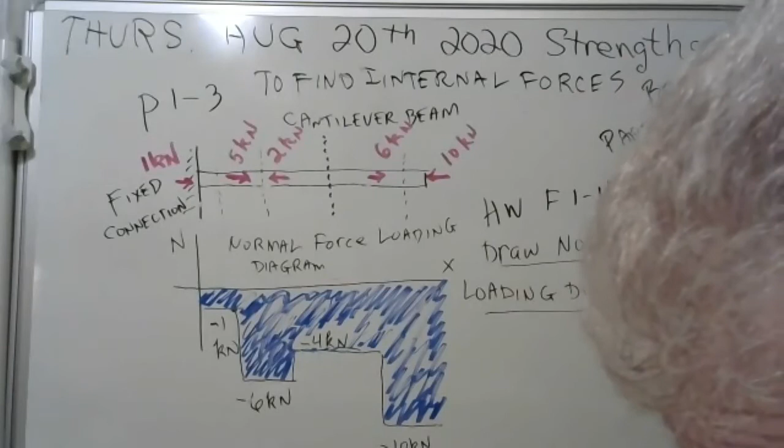I'm sorry, I don't have the book yet, so I can't look and see what question number 2 on page 16 is. Yeah, that's homework number 1. Okay, thank you very much. And some of you might have already done it and turned it in, and if you have, it's not the end of the world. But that's what I wanted. Well, no, that problem F16, that was homework number 1. Homework number 2 is F1-11. Yeah, this is homework number 2.

Was that Braxton I was just talking to? No, sir, that was Darren. Darren, what was your question again? I don't have the book, so I can't see where question number 11 on page 39 is. So I was just asking what homework that was, or if you're adding it to one of the homeworks. Yeah. Now it is on page 39. You're right about that.

What are you going to do? Do you have a book coming, Darren? Yes, sir. It's going to be here today. I just don't have it with me yet. See, I have a book in the library. The only thing is with this crazy virus thing, I don't know if the library is even open. I think it is. You could go in there and get it. It's on reserve. You have to ask the librarian, and they'll loan you my book there.

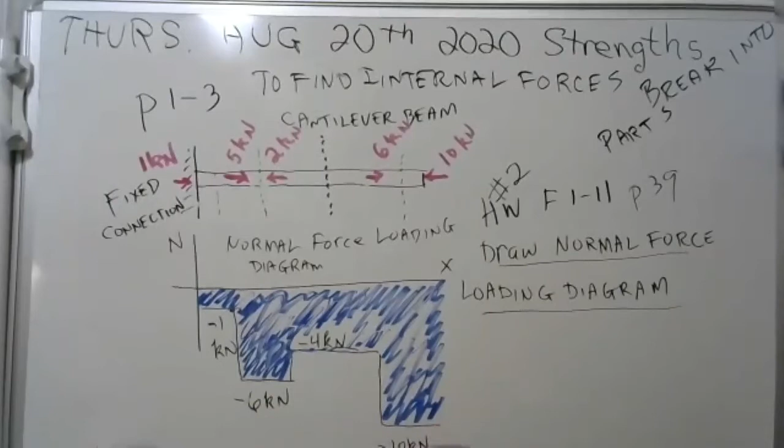Okay, well, we got time for some more fun here. Let's try something else. Or you can make a buddy. Find a friend that has a book. And I think you can probably get the book online, or you could rent the book, or you could buy it used. There's a lot of different options there for students. Now I'm trying to remember what I wanted to do with you guys. Oh yeah, here we go.

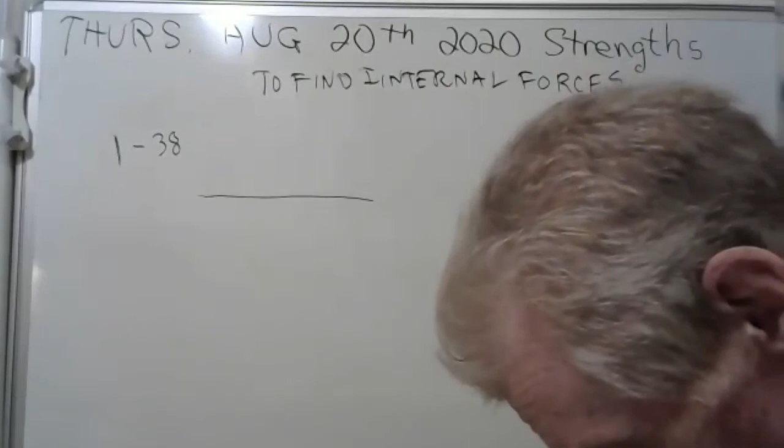This is problem 1-38. Now let me find it. I don't know what page it's on. Okay, I found it. Now what they've got there is a board, a 2x4 actually. It's 2 inches, artist rendition here. It's a 2x4. And they're going to put a 200-pound tension force on it. 200-pound tension force.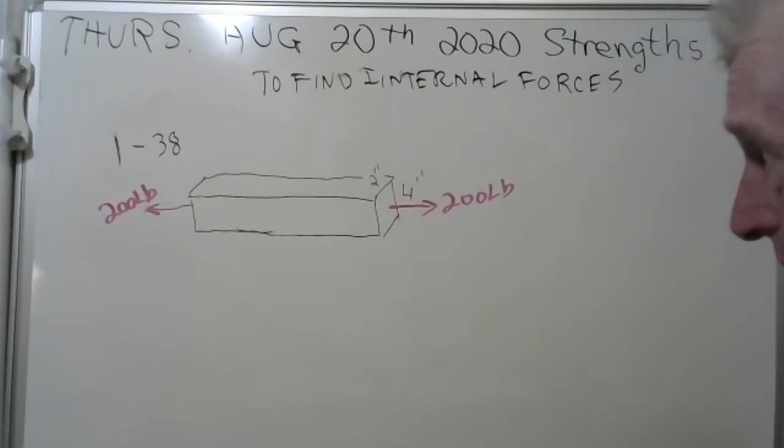They want the normal and shear stress in this board, but they would like for us to do it on a 20-degree slant. Well, first of all, let's just find what it would be if you sectioned it perpendicularly like this. Then internally you would have little dashed lines here. Can you see that if you just looked at the left-hand section, you'd have to have 200 pounds going to the right because there's 200 pounds going to the left? Now the 200 pounds inside here would be internal.

Hey, Igor. Go ahead, somebody said something? Or was that just a sneeze?

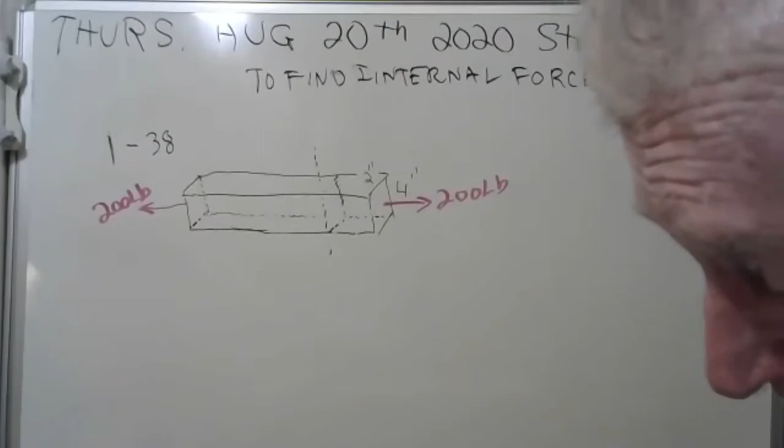Anyway, you'd have 200 pounds. And so the normal stress would be 200 pounds divided by, well, it's 8 square inches, right? A 2x4 is 8 square inches. And so you would have, is that 50? Did I do that in my head right? 50 PSI. PSI stands for pound per square inch. Did that make sense? Did I do that right? Is it 50? It's 25.

Tell me your name. Nick. Nick, you just got yourself a thank you point. 8 into 200 is not 50, it's 25. Guys, there's hope for you. You're smarter than the instructor, so you're going to be fine. But what you've got is 25 pounds per square inch normal stress. The name of that is normal stress.

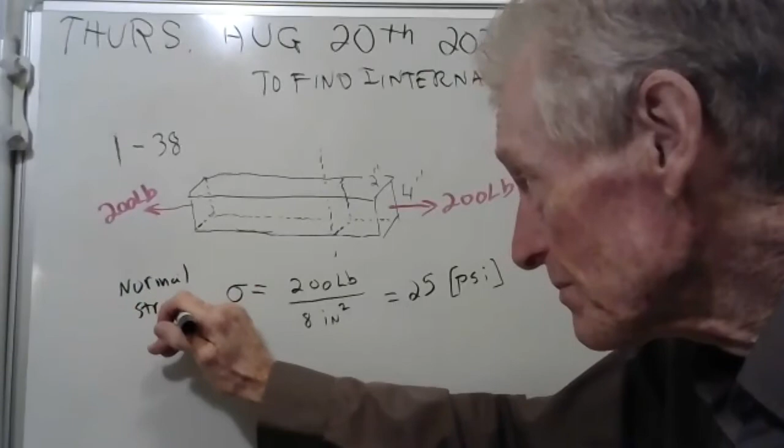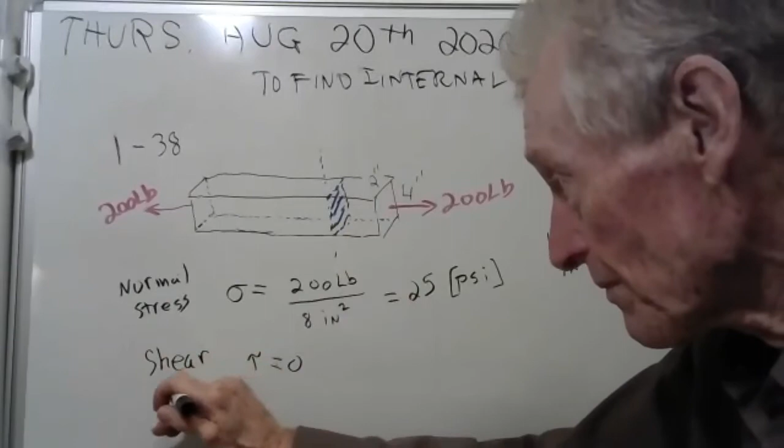Now there is no shear stress because on this section here, I'll color it for you with my blue color. See that blue area? There is no force parallel to that blue area. So the shear stress is 0 on that blue area. But guys, that's not what they wanted. We only have 5 more minutes together, but I think I can show you this.

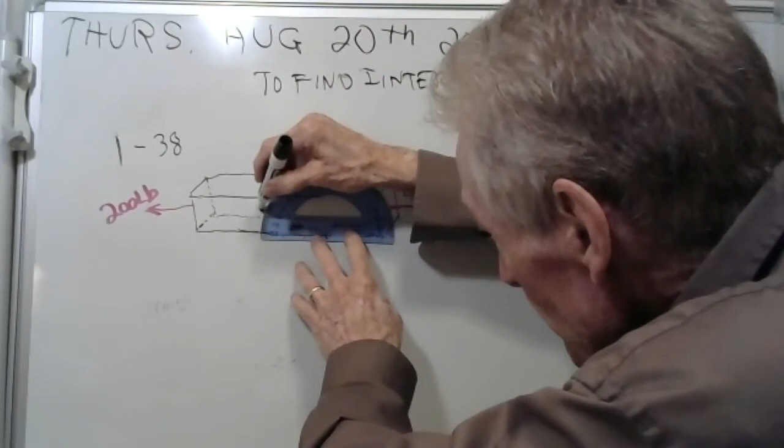They wanted us not to cut it perpendicularly like that. They wanted us to cut it at a 20-degree angle. So let me do that. I don't need that blue area anymore. I'm going to get a 20-degree angle here. Maybe I better do it in here someplace. Okay, 20 degrees is right there. Oops. So we're going to cut it like that, and we're going to come in here like this.

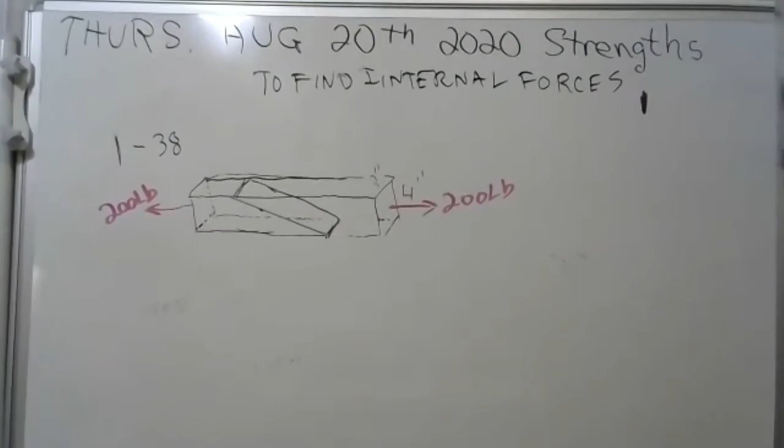Our artist's rendition here. I probably should have drawn that with dashed lines, but you get the idea. They want us to find the normal and shear stress on that area. Well, let's just section this, get rid of all the rest of the stuff. We don't really need it. Just say goodbye to all that. We don't need all that.

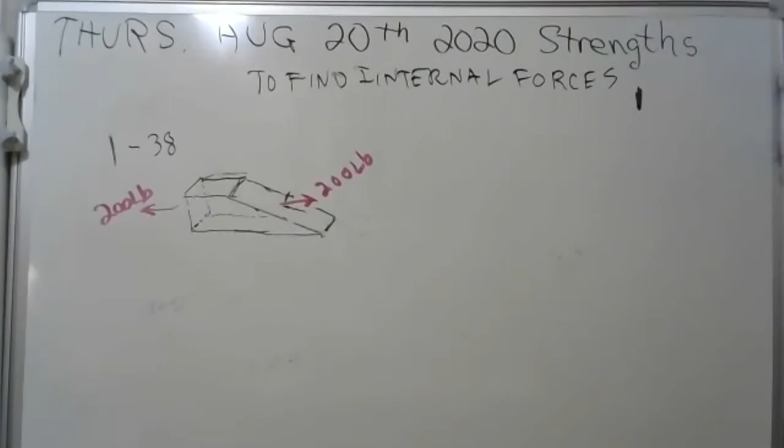Now here's the thing. You've still got the 200 pounds acting on this area to the right, because the sum of the forces have to be 0 on this body. But see, this has a component going parallel to the plane and a component perpendicular to the plane. See, this is called the normal force, and this is called the shear force.

Now, the shear force is 200 pounds cosine. Now, be careful. If this is 20, that's 20, cosine of 20. And the normal force is 200 pounds. It's trigonometry. It's a sine of 20. And so we're going to get that amount. Here goes. Oh, gee, I'm running out of time. It's sad.

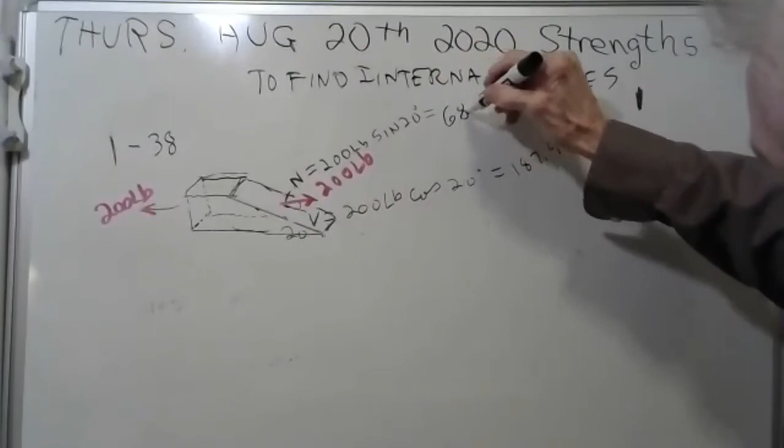I'm getting 187 something pounds is the shear force. And the normal force, well, I can do that. No, I can't do it in my head. That's too hard. 200 times sine of 20. I'm getting 68.4 pounds. Now, let's see how we did. I want you to look up the answers to 138.

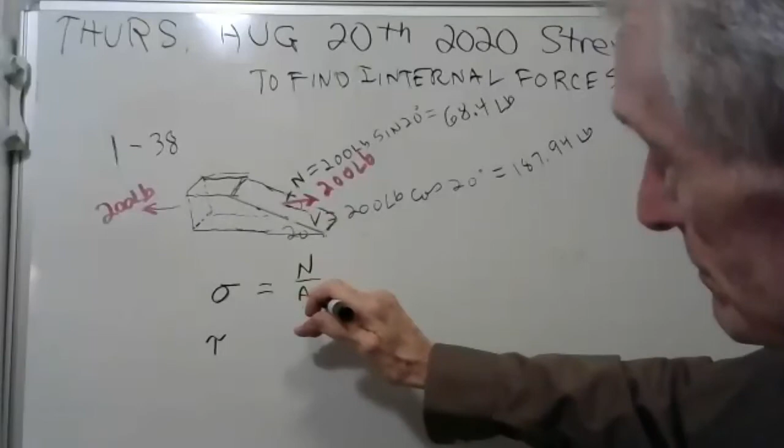Oh, wait a minute. They want the stresses. Okay. They don't want just the normal force and the shear force. They want the normal stress and the shear stress. If you read the problem, isn't that what they want? Yeah. But see, the area here is this area here. Well, it's the normal force over that area. We know the normal force, it's 68.4. But what is that area? Well, it's bigger than 8 square inches, isn't it? You know what it is? It's 8 square inches.

Now here's where I'm gonna have to think and think and think. I think you divide by the cosine of 20 to get it. I think so, because see, the cosine of 20 would be equal to this distance divided by that distance. You want to call that distance x or something. It's x over, wait a minute now. I don't know if that's right or not. Let me think about this a minute. See, I know what this is. It's 8 square inches. And I know what this is. It's 4 inches. Here, let's do it this way.

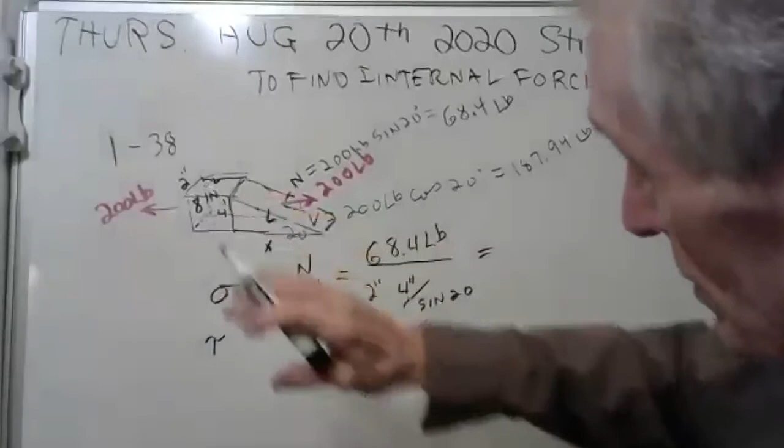That area is going to be, well, that's 2 inches there. It's going to be 2 inches times 4 inches, I think divided by the sine of 20. Maybe that's it. Let me think about that. Now see, the sine of 20 is 4 over this distance L. Yeah, that's it. And if you'll do that, you should get the normal stress on this area. Let me do it. I'll have to explain this better when we have more time. I'm getting 2.924 psi.

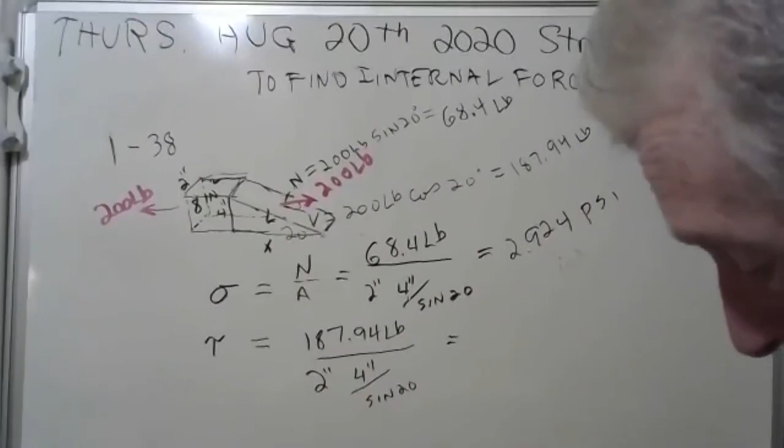Now let me do the shear stress. Well, see, the shear force is 187.94 pounds. And if I did that right, that big area is 2 inches times 4 inches divided by the sine of 20. Let's get that answer and then we'll check it and we'll get out of here. Okay, divided by that times, I'm getting 8.035 psi.

Now help me look at the answer book. What is this, 138? Okay, answer book says, that probably didn't make a bit of sense. They said 2.92 psi, that's what the book got. And they said 8.03, they rounded off. Well, that's one way to do it. I'll show you an easier way next time.

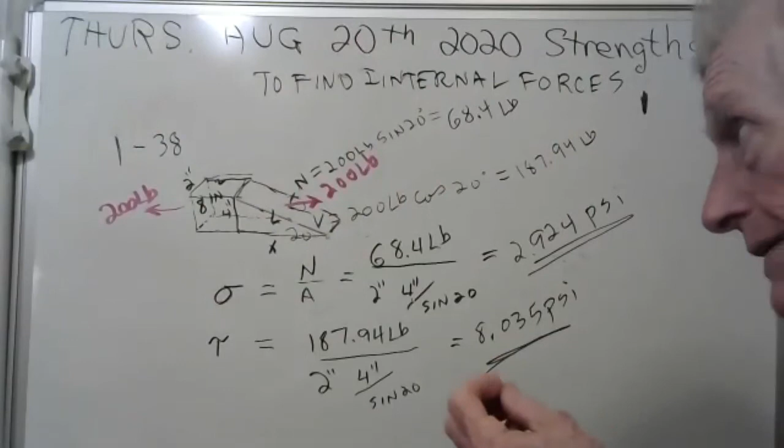But the moral of the story is to find the internal loading, you have to break it into parts. Well, I broke it into a part. I sure did. And I found the internal loadings. And then to find the stresses, you have to divide by the areas. You might have got lost on that, but I found that area, divided by the area, and I got the stresses. And those are the right answers.